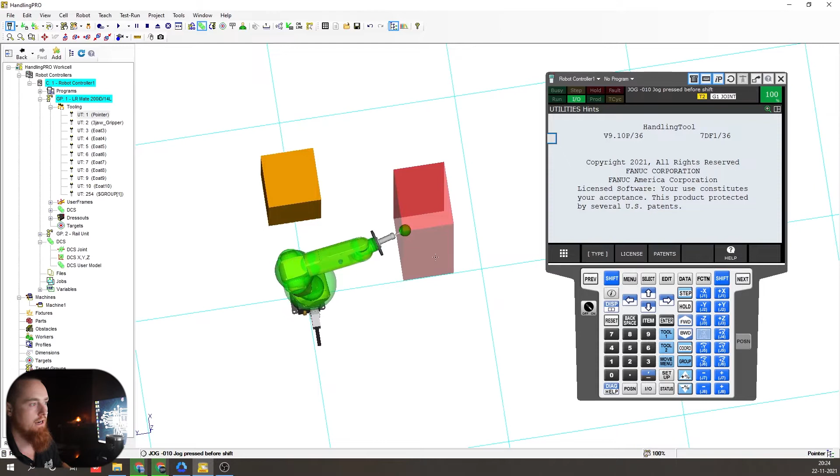So let's go ahead and jump into this thing. So here we've already created a couple of zones. We're mainly going to be paying attention to this red zone right here. So this red zone is the restricted zone that we've already created. And notice that the robot has the green spheres around it. So the robot's user model is these green spheres. And we'll get into the user models a little bit here in just a second.

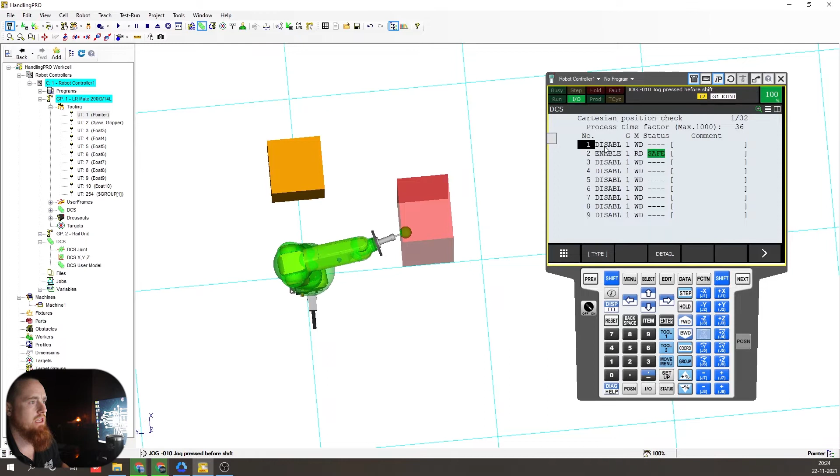So we're going to go over here to the DCS. Here we are, we're in the DCS. We're going to Cartesian position check. Okay, as you can see, we have the number 2 DCS zone enabled. It says it's safe right now. So that status indicator tells you safe. There's another status indicator safe up there at the top. And it just basically tells you whether you have protruded into that zone or not.

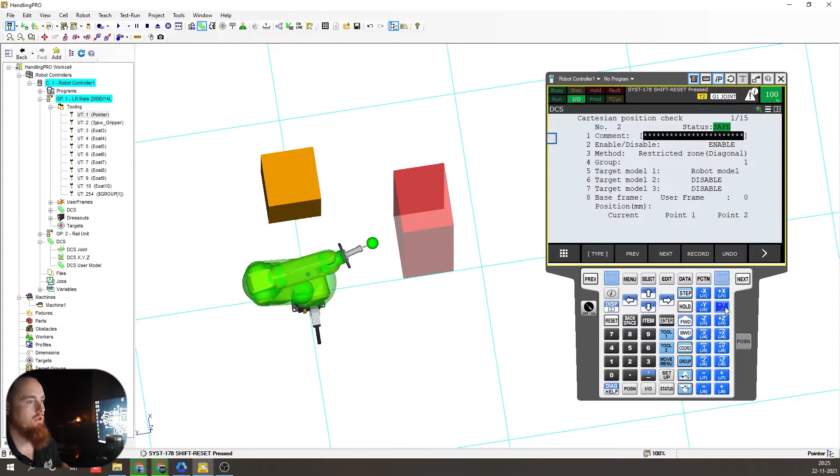And so we're going to go ahead and reset the robot, and we're going to jog out of it first. Now we're going to jog back into it, okay? Notice we've protruded through the zone, and our robot still hasn't faulted out. And our robot tooling is now in there. So if there was a human in there, we would have basically just hit a human, and there's a reason for that. The reason why it's doing that is because we don't have a user model set up. So our tooling is not protected. Only the robot arm itself is protected at the moment.

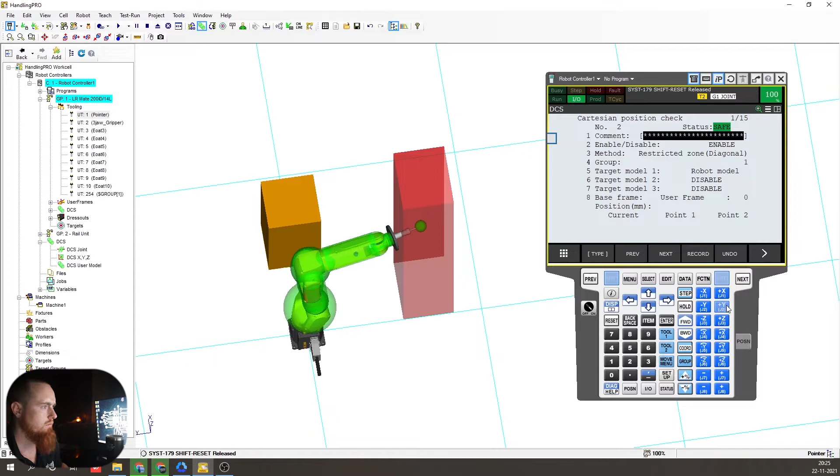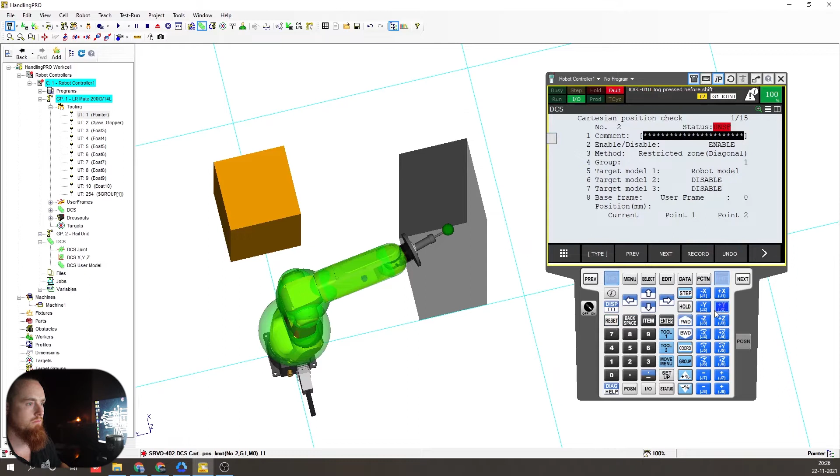So we're going to go ahead and jog a little bit further. Boom. Now you can see our status indicator just went to unsafe, and you can't really see it very well in this angle that we're looking at, but there is actually a zone at the flange of the robot, and that's what's actually hitting the DCS zone right now, creating the unsafe condition. So we're going to go ahead and reset this and jog back out of it again. So shift, reset our faults, move a negative Y backwards. Boom.

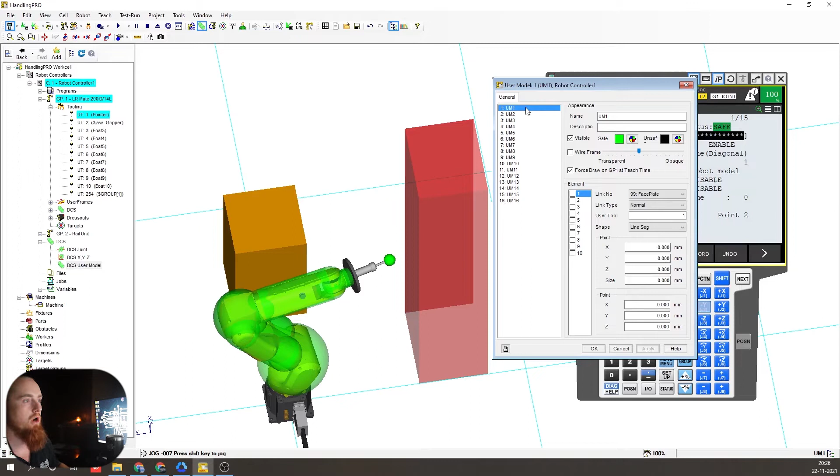So we're going to go over here and go to DCS User Model. So the DCS User Model, it's in your DCS options over there. You can also navigate through the Teach Pendant and do all this stuff, but it's a lot easier through Roboguide. So UM1, all these options are inside of the FANUC Teach Pendant. So it'll just look a little bit different, but overall the settings are still there.

So these user models right here, you can set up 16 different user models. So these user models will be utilized if you have a fixture that is in the cell and then maybe it's out of the cell, or maybe if a light curtain's broken or a safety mat's turned on, that you turn on that user model. And then whenever somebody leaves that area, then you turn off that user model.

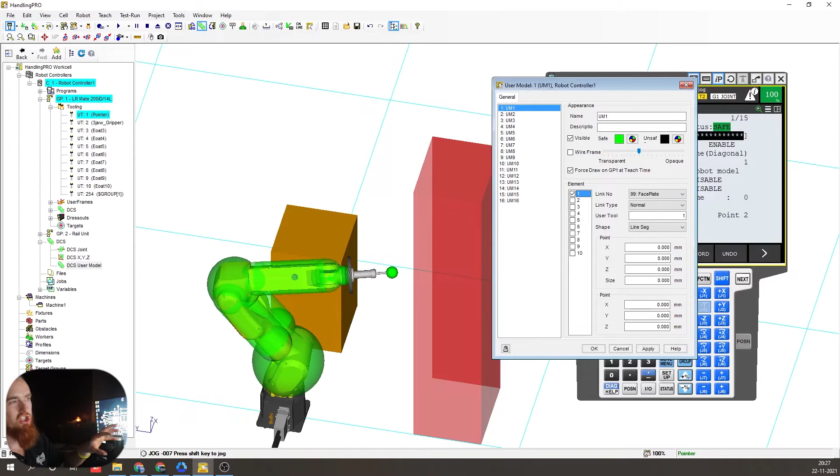But user models are generally attached to the robot or some extension of the robot. They're not going to necessarily be a DCS zone that you turn off and on per se. So we're going to go through some different options. So where do you want to attach this at? You want to attach it at the faceplate.

So 99 faceplate, normal, vertical, horizontal. We're going to go normal, user tool actually. So this is the user tool. So you can have these actually change whenever you change your tool frames, because these are meant to be used with tooling.

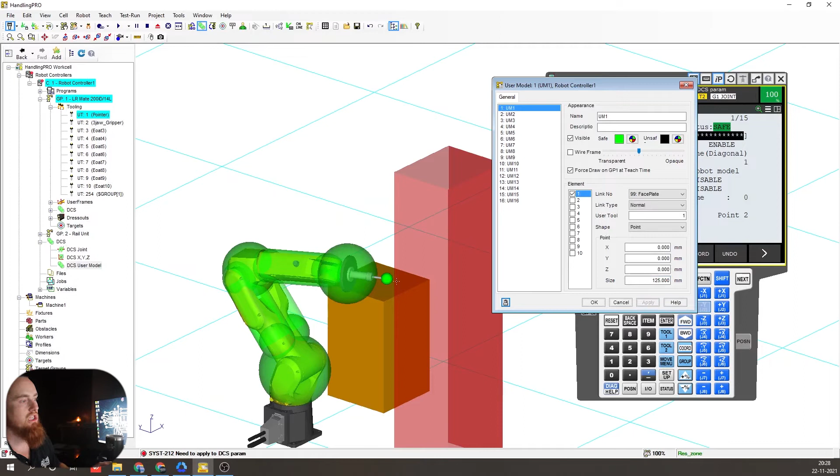So here we have line segment, 2 spheres, box, point. These are the different types of DCS zones that you can create, or different types of user models that you can create. So right here we just selected a point and we're going to put a size to it. Boom. So this is the radius, I believe. This will change the sphere size of this point.

So it's one little particular point in space, and then from there the size dimension, and then your XYZ is going to change where it's at from that flange. So it's at the 0 point of the flange right now. If you look at it, basically it's exactly where the center point of that flange is at this moment. So we're going to go ahead and change it just to demonstrate.

We're going to do a line segment. Notice how it changed. You have different settings options now that we changed the type of user model that we're going to do. So we're going to go ahead and just change the size real quick. So we're going to put a 75 in here. Going to apply it. We also have to hit the checkbox up here to indicate what elements we want to be turned on in this user model. Then we'll apply it again.

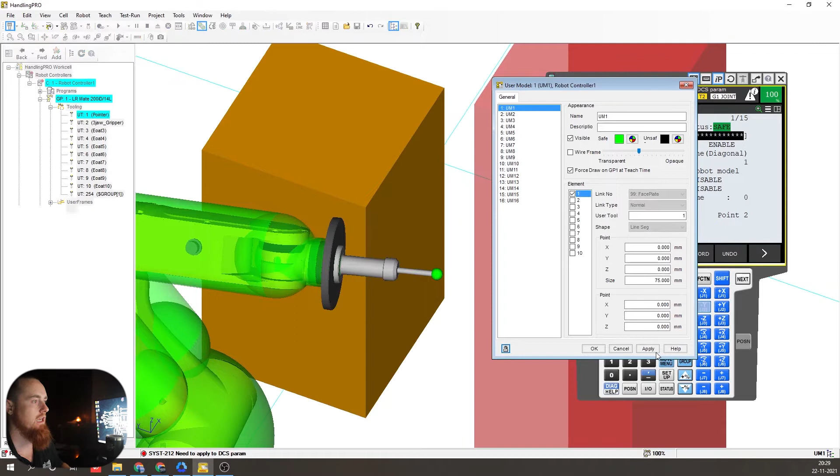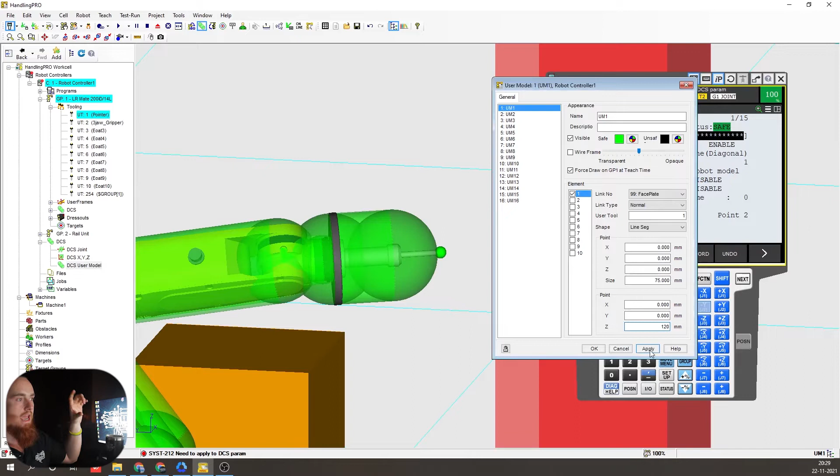Okay, boom. Now you can see we have our user model that is active. So right now we have 2 particular points that are sitting at the same exact spot in space. So we're going to change the Z value. Boom. So now that we changed the Z value, now you can see those 2 points are now separate points. So this creates like these 2 spherical objects, as you can see right here, and creates like a cylindrical object to go along with it.

One thing to keep in mind is different DCS shapes take up more DCS memory. So as you can see, we can change the size of this thing. Kind of just playing around with it a little bit, just to demonstrate a couple different things and how things react whenever you make these changes. So now we're going to go to a box. The box is actually one of the most resource intensive objects. So the sphere is, I think, the most simple and less resource intensive object.

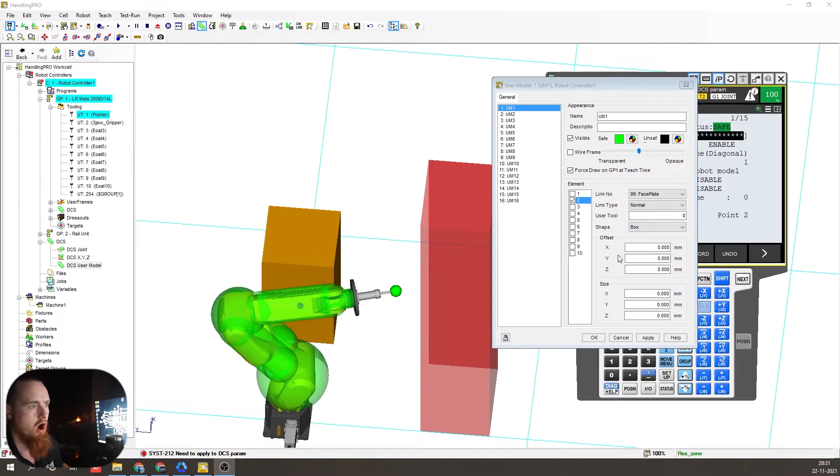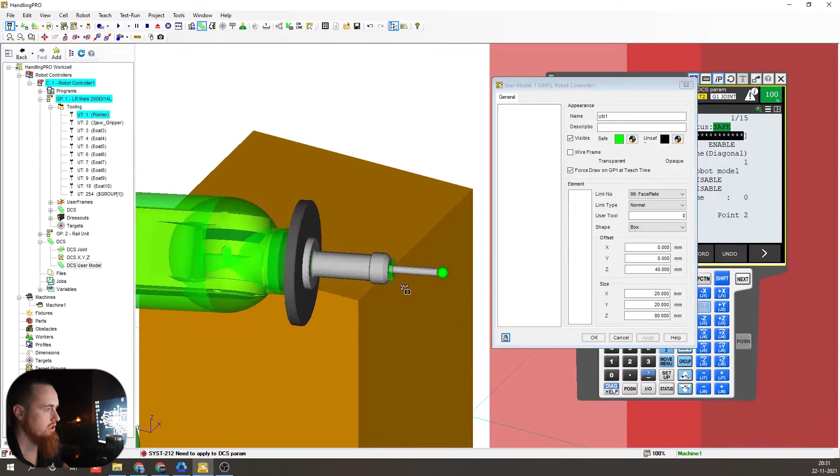So we got the box, we have an offset, and we have a size. So you will not see anything here unless you create a size. So you have to give this thing a size, and then we're going to go ahead and give it offset as well. So say 40, and then a 20, another 20, and let's go 80. Boom. Still too small, you can barely see it. So it's inside the cylindrical part of that tooling right there.

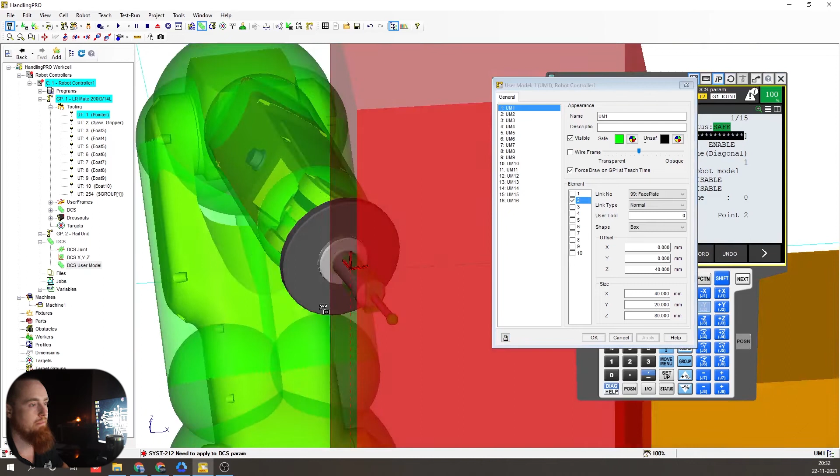And another thing to keep in mind, the bigger you make your DCS, the more resource intensive it is as well. It's definitely an issue on the older robots. Newer robots are getting better about it and can handle more. So we're going to change this one to a 40, apply it, boom. Now you can see how it got bigger. Notice when we change X what direction it changes in.

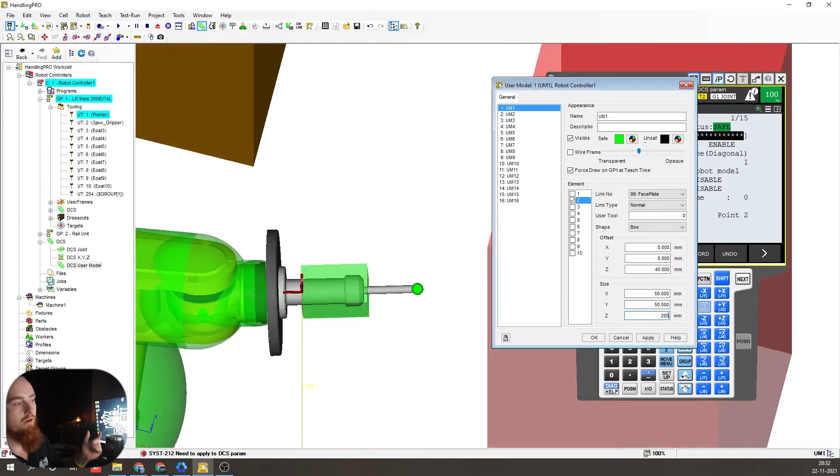So you see that triad right there, the XY, that is the direction in which it is growing, or you're changing its dimension in. So notice how we just changed 50 and it got wider because that's the Y direction. Z is out from the tool. So you can hold your finger like this and your thumb is Z. So actually it's like this. So Z positive always goes out away from the flange of the robot. Okay. Go to point.

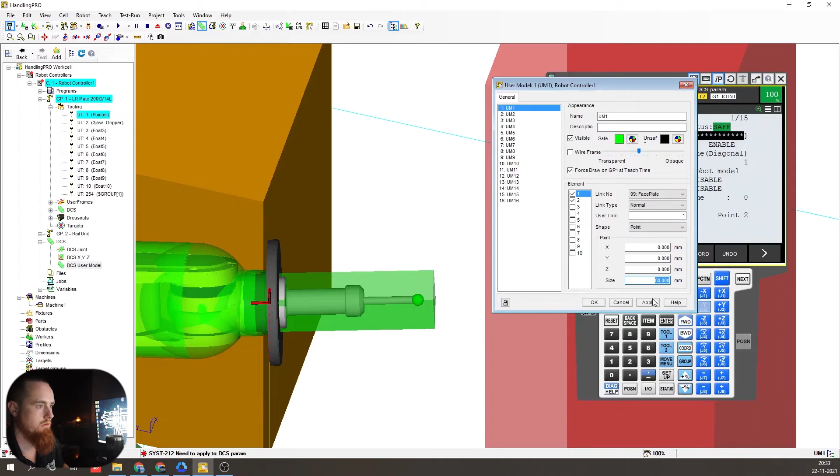Apply. And so now, as you can see, we have two different elements here. We added a sphere, and then we added a box. So you can combine these things together to create a user model.

The main reason for being able to do that is so you can have a more fine-tuned DCS, and also make it so that your user model is not super resource intensive, because it can actually have impact on a robot's cycle time, memory, and scan time inside of a program.

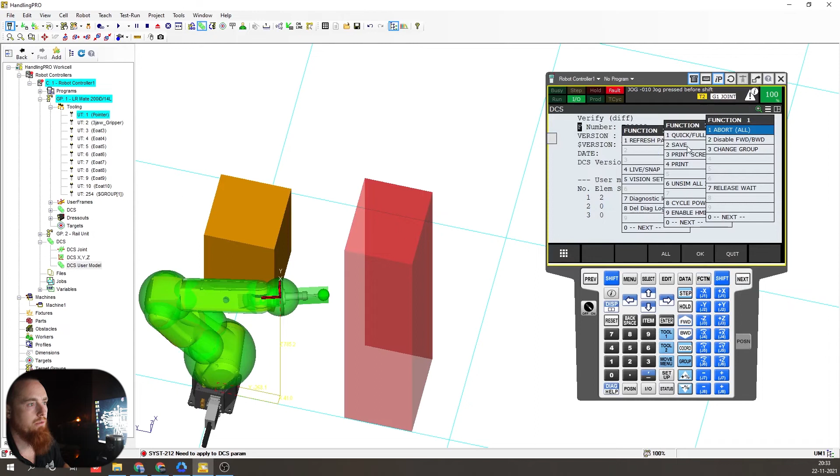Notice how it says there's a change right there. We have to apply the change and say okay, and then we just got to cycle the power to this robot to be able to accept these DCS changes.

So the way DCS works is it has two CPUs. Every safety PLC, anything like that, has two CPUs. You have to cycle power always on, like the FANUC robot, to align the safety part of the processor and the non-safety part of the processor. You have to do that on a lot of safety controllers and things like that as well.

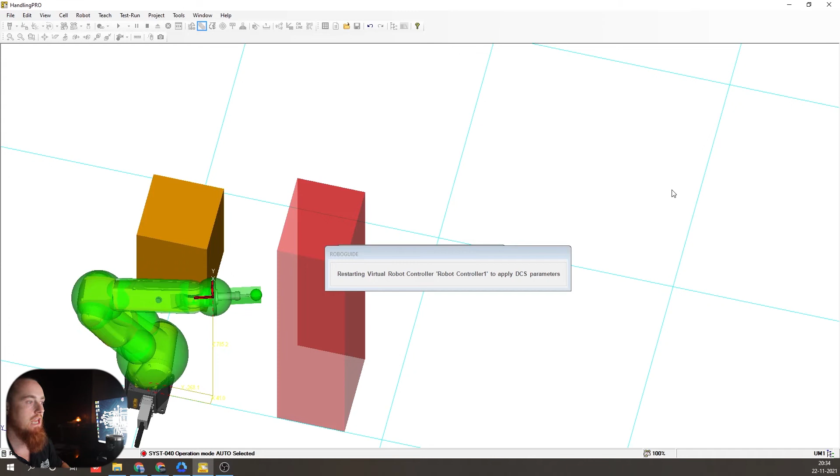It asks for you to cycle power after a safety edit, and that's just so the two CPUs that run inside of the safety system are running the same code. Whenever you have two CPUs, there's always a comparison check going on between the two pieces of code to make sure they match.

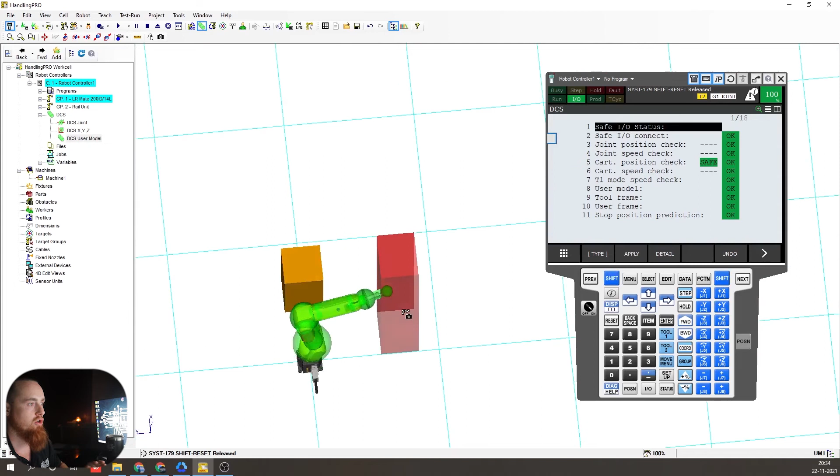Okay, so we just jogged inside of here. Notice that there's no fault on the robot. So the robot did not fault out when it entered the DCS zone. So, make sure you check your DCS zones to ensure that they are set up appropriately, and always verify your safety related items.

So we need to go into here, into our actual Cartesian, or into our DCS zones, and go into our user models. This actually makes it so that you can associate a user model. We're going to choose UM1 because that's what we used. Apply it. We'll apply it here as well.

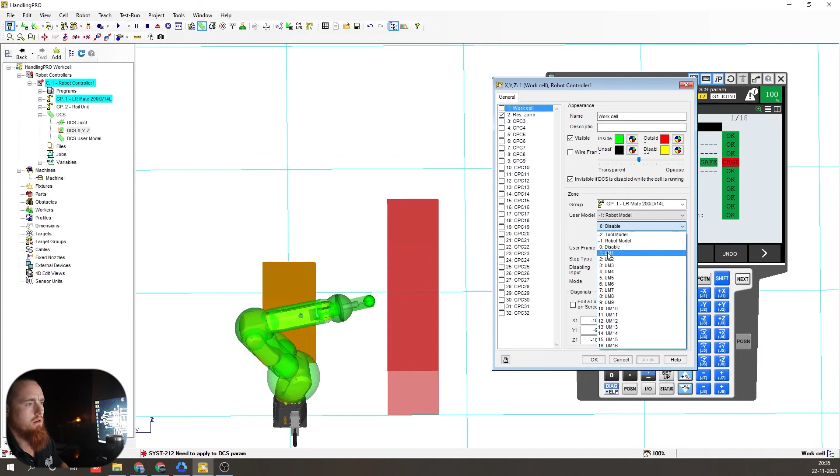This just makes it so that you can associate a user model with a particular DCS zone, because maybe there's some particular reason that you don't care that the robot tooling is affected with. Maybe with robot tooling, with any type of human interaction, you want to protect it. But maybe with a jig fixture, you don't want to, because you don't want a false collision. Or maybe you want to use a different model whenever you go to pick an object up, but when you're moving through space, you use a different one.

So we're going to go back to our DCS settings. Boom, DCS. Notice how it says change again. It says we're safe. We have to do the same, apply, and then cycle power again.

Run, unregistered tool frame. Okay, so the reason why it's saying unregistered tool frame is because we're using a frame that we have not created, if I'm not mistaken. UM1. Oh, yeah, so user tool 1 right here. And then this one's a 0.

So we got to make these two match real quick, because we have two elements with two different user models, or user frames, I should say—sorry, tool frames. So we applied that tool frame 1, and then unregistered tool frame. Do you want to apply that? Yep, change the settings.

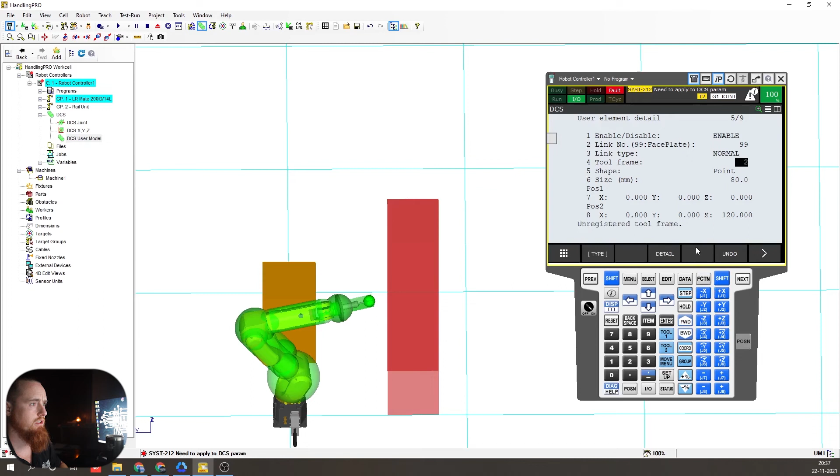Okay, yeah, so like I was saying before, we didn't have the tool created, so you have to have the tool frames taught and created in order for it to accept the tool frame in its DCS zone. So if you have an issue with not being able to register a frame, it's because you didn't teach it. See, now that's 0 in the user tool.

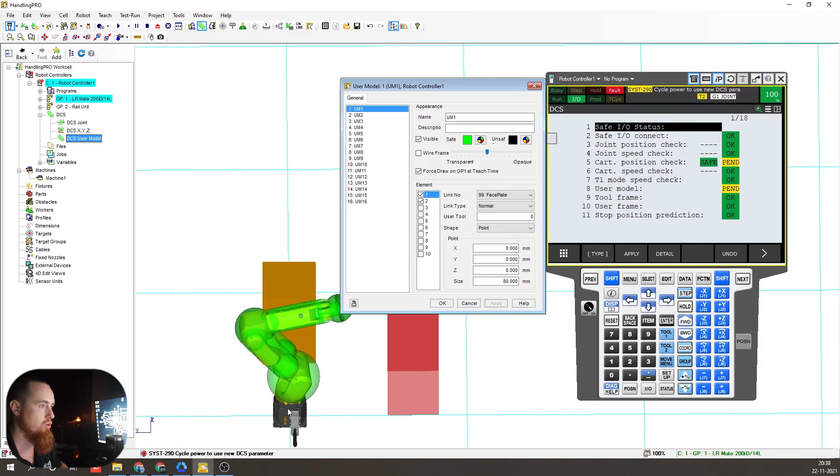See how we just edited it in the teach pendant and edited it here on the Roboguide side of things? They're very interlinked and intertwined. See, that's a 0 as well. We just don't have a user tool created, or a tool frame created for this robot. So we're cycling power again to accept these edits.

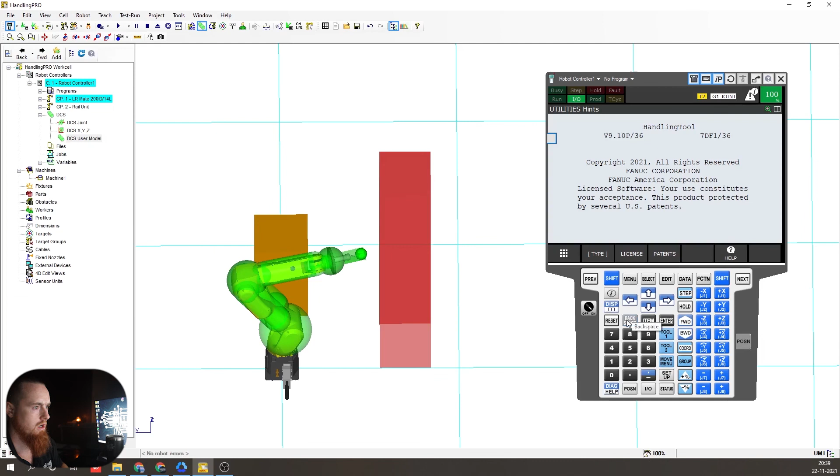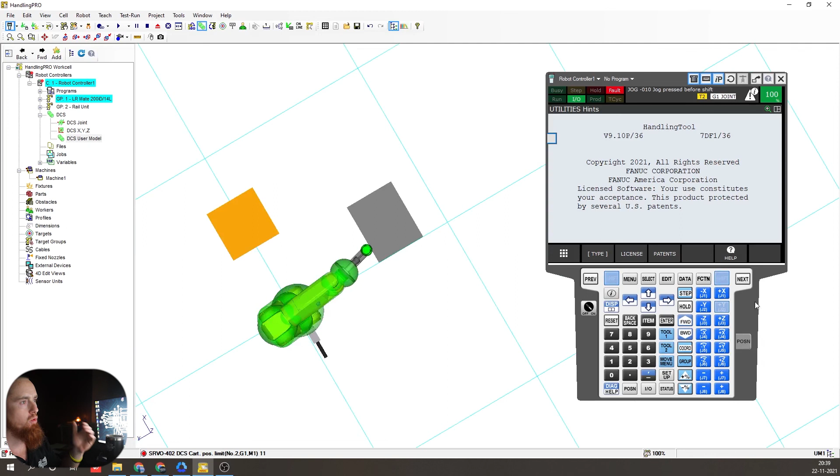Alright, so we're going to go ahead and jog this robot. Shift, reset, and we're going to jog in the Y direction. Boom. Okay, notice how as soon as that robot tooling hit the DCS zone, they both went black. So the black in Roboguide indicates that these are the two collided zones—the two unsafe zones, according to FANUC. So right now we're in an unsafe state.

We jog back. Notice the zone goes back red again. The tooling goes back green again. So essentially we created a user model—it wasn't so much a DCS zone, but hopefully this was super useful for you guys.